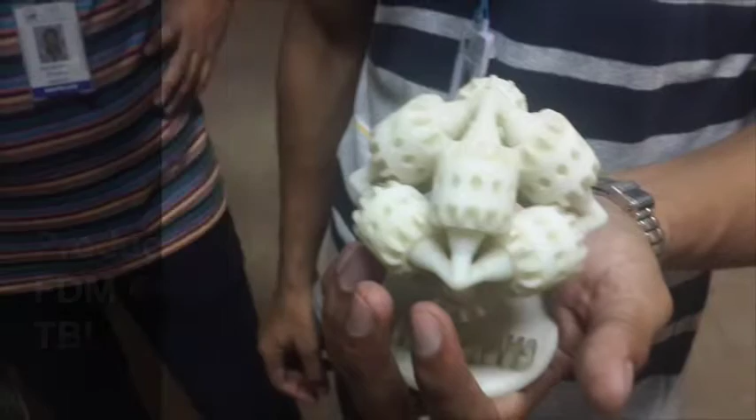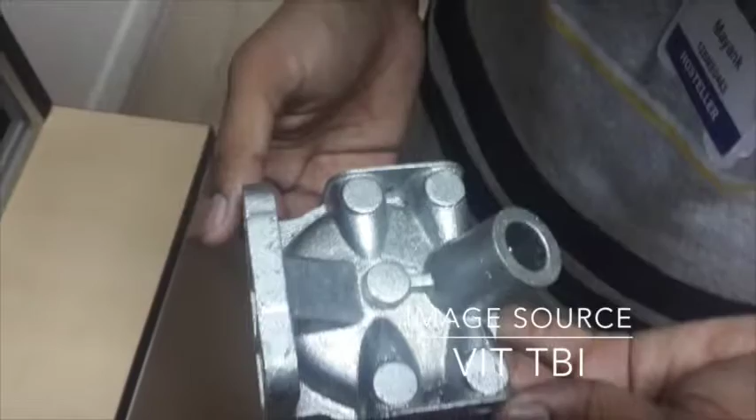Hi friends, today we are standing at the VIT Business Incubator Center. Today myself, Kevin Thomas, and my friends Mayank and Abhimanyu, we are going to speak on the topic rapid prototyping. Especially we are going to spread light on the topic fused deposition modeling.

This fused deposition modeling method was founded by Stratasys, and it's a relatively new topic, just founded 20 years ago. This method has revolutionized the area of rapid prototyping. You just think of anything and you just think of printing it. Fused deposition modeling, like all other rapid prototyping processes, is an additive form of manufacturing process in which we create layer by layer, fixing one layer over the other.

The biggest advantage of this process is the material saving. In subtractive forms of manufacturing, we lose a lot of material. So the biggest advantage is the material saving. Whatever material we are using goes into the product. So let's explain the working of this fused deposition modeling.

So 3D printers that run on FDM technology build parts layer by layer from the bottom. We build the bottom first and then we move up till the end. The slicing of the material is done in the software. Like if we have a 25-millimeter high prototype, we'll be making slices of around 0.25 millimeter, so we'll get around 100 or 101 slices. The material used in this is thermoplastic filaments.

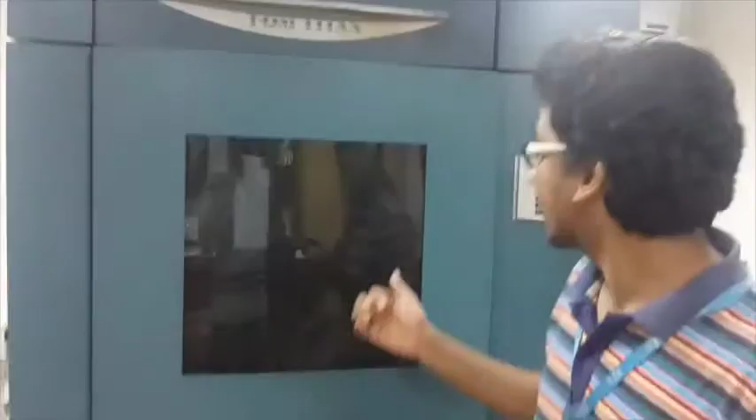Hello friends, I am Abhimanyu, and as my friend has explained the FDM process, now we will go to the machine. This is the FDM Titan, made by Stratasys USA, and the model is FDM Titan TI. The bed size is 406 by 355 by 406 mm. The materials are ABS, ABSi, PC, PC-ABS, PC-ISO, and PPSF.

The unique features of this machine are a versatile RP platform, multiple high performance materials, powerful Insight software, and office operation with no special venting. It is easily upgraded to handle future materials, and this Titan uses the patented FDM process and revolutionary water-soluble support for ABS material.

It allows us to dissolve the temporary support structures with water rather than manually handling them or using solvents. Insight software makes building durable and functional prototype parts as easy as sending a CAD file from your workstation to a Titan. Simply plug it in and connect it to your workstation and network.

The working temperature for ABS is 90 degrees Celsius, for PC it is 145, and for PPSF it is the maximum, that is 230 degrees Celsius, the maximum temperature it can handle.

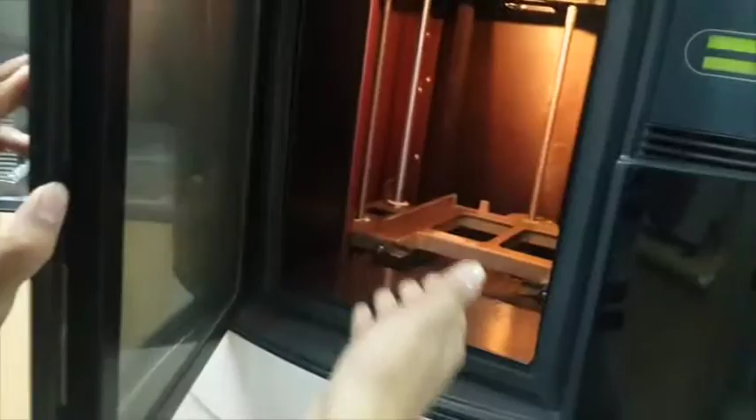This machine is the Dimension, and the bed size is 203 by 203 by 305 mm. The material it can handle is ABS thermoplastic, and the layer thickness is 0.33 mm. The wall thickness it can obtain is 0.6 mm. As we can see, this is the RP platform, this is the build platform, and this is the connecting rod, and it comes from top to bottom, and then the part is manufactured. Yes, we can see.

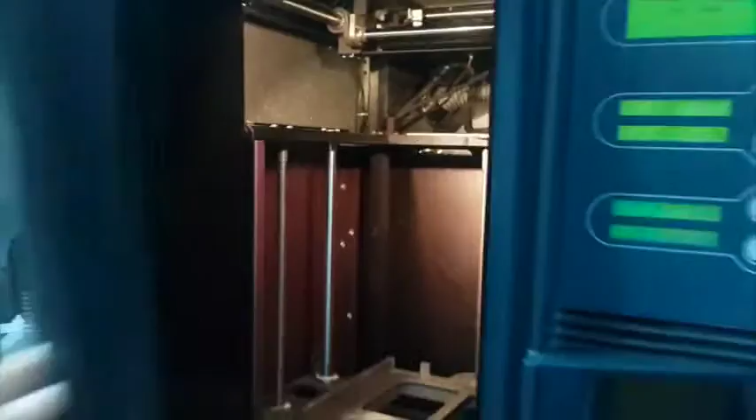This machine is the Prodigy, and the build size is 203 by 203 by 305 mm. The material is ABS thermoplastic. The layer thickness is 0.1778 mm. The wall thickness is 0.6 mm. This system builds models including external features quickly, directly from CAD STL files.

The acceptable file formats can be obtained from AutoCAD, CATIA, I-DEAS, Imageware, and SolidWorks. The format in which all these files are sent to this 3D printer is .stl. This file format just shows the geometry, without showing the colors and textures.

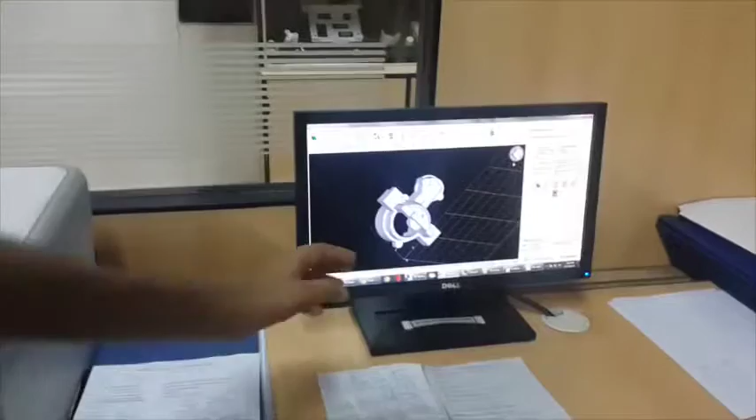In this, the main part is the orientation that we have to decide at the beginning of the process. So first, as we can see, how we select the orientation depends on how we want this product to look.

So as you can see. Now we are moving on to the main part of the process. Whatever we saw now, it's only what the computer does, and that computer is here. The software we are using here is the Insight software.

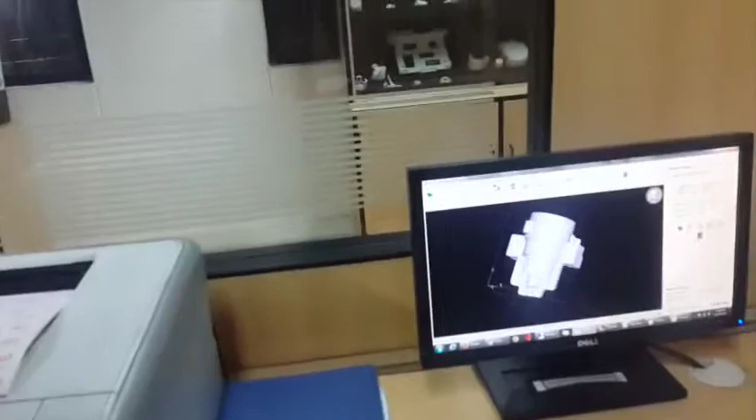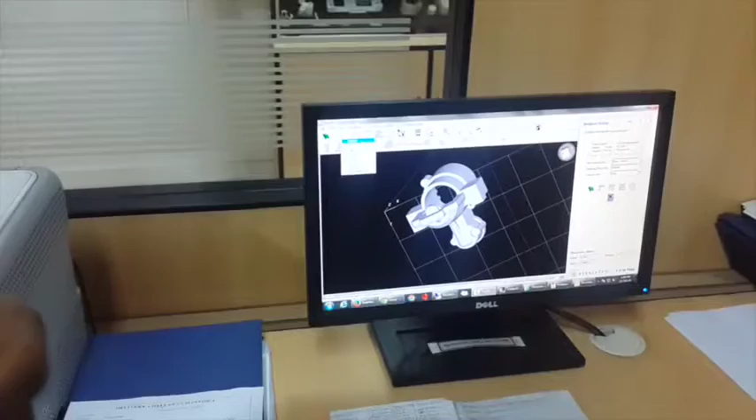In that, the first process is taking the part from the part file, importing it to the software, and then there could be innumerable orientations possible. So we have to choose that orientation in which the overhanging parts are less, and we have to see that the orientation itself will decide the aesthetic look as well as the strength of the material. So we have to choose an orientation in which less support material will be used.

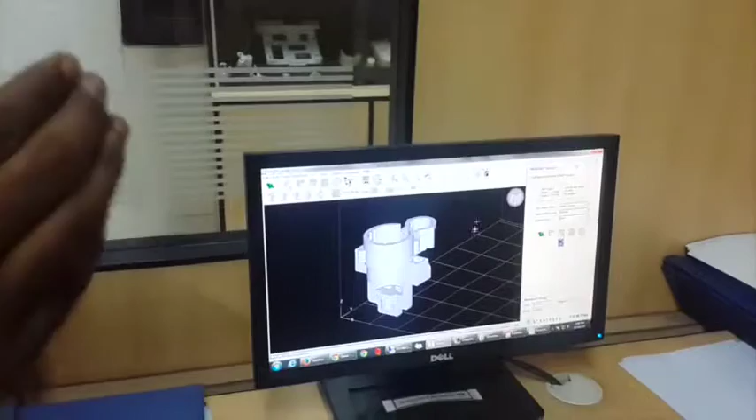So in this, we are taking the bottom plane and we are going to select it. Bottom plane we'll select, and the bottom plane is going to be selected now. So this will be the orientation in which the part will be built. This is the easiest way that will reduce the staircase effect, and the material will have a smooth finish to its surface, and the aesthetic look will be the maximum in this orientation.

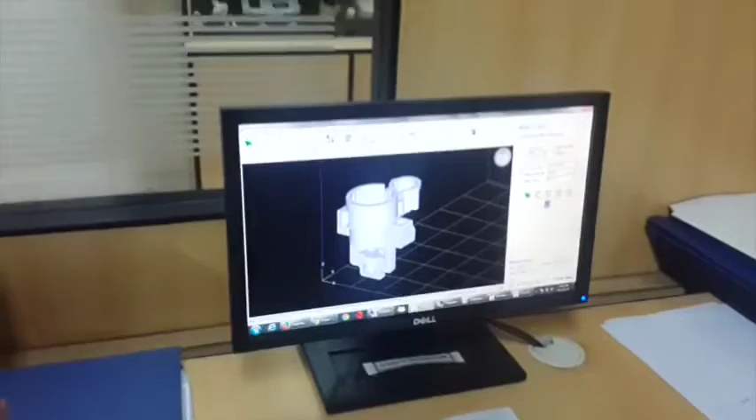So the next process is slicing. Here we are going to slice along the Z axis. So we select, now we can see the small slices, and the slice thickness will be around 0.2540.

Hello friends, my name is Mare, and my friends have already told you the basic principles of this machine and what kinds of machines we have here. So now I am going to tell about the type of material we are using in this machine. So first of all, what are the types of materials we have used here?

One is ABS, that is acrylonitrile butadiene styrene. That is a thermoplastic polymer. It is mainly suitable for functional applications. As we have seen, injection molding uses ABS material, but in the case of FDM, the strength we get is 80% of injection molding. The second material is ABSi. It is basically a part of ABS in which we get high impact strength.

The third type of material is ABS M30, which is also part of ABS, in which we get 25 to 70% stronger than normal parts. It is used for making smooth parts and has greater fatigue strength. And the other materials we use are ABS-ESD, PC-ABS and PC-ISO.

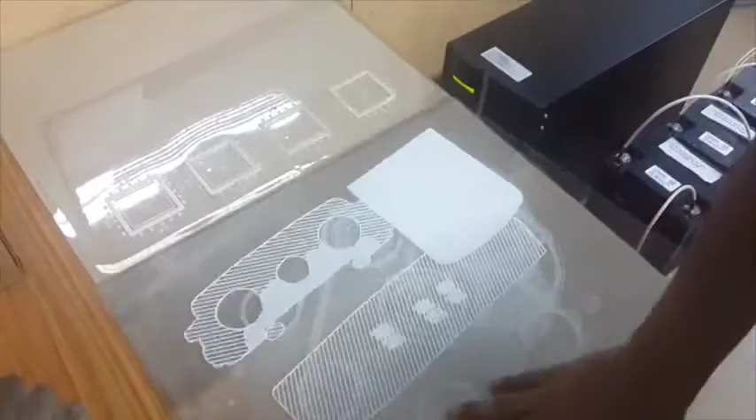And so guys, now we are going to see the delivery system. This is actually the cartridge which is fitted inside these things. So in this, what happens is that it's a one-time use thing. This is actually a support material, which is the weaker material, and it's like a plastic thing only. So when this material finishes, this thing is thrown out. So every time we need a new cartridge for the process.

The major defect in the FDM process is the staircase effect. Due to this effect, the surface finish of the products formed is less. What is the staircase effect? The products formed are very good in the XY plane. But as we know, this is a layer by layer process. So if one layer is deviated, then all the layers are dragged, and so there is a deviation in the Z axis. Due to that, the surface finish is not good. That can be improved by post-processing, like polishing or grinding.

Another big defect of this process is that we need support material. For every process there is a support material needed just to support the product. So every time we need an extra material, which will add extra cost. So friends, this is all about fused deposition modeling.